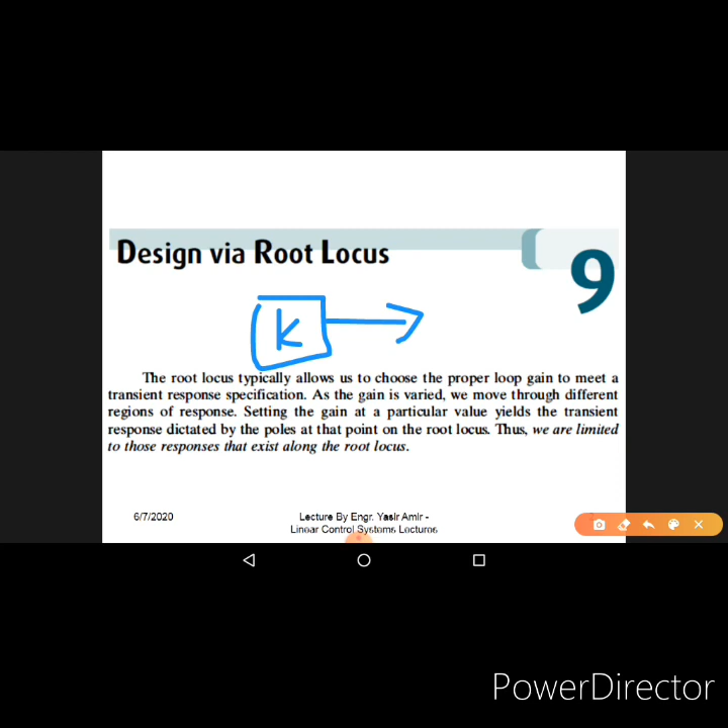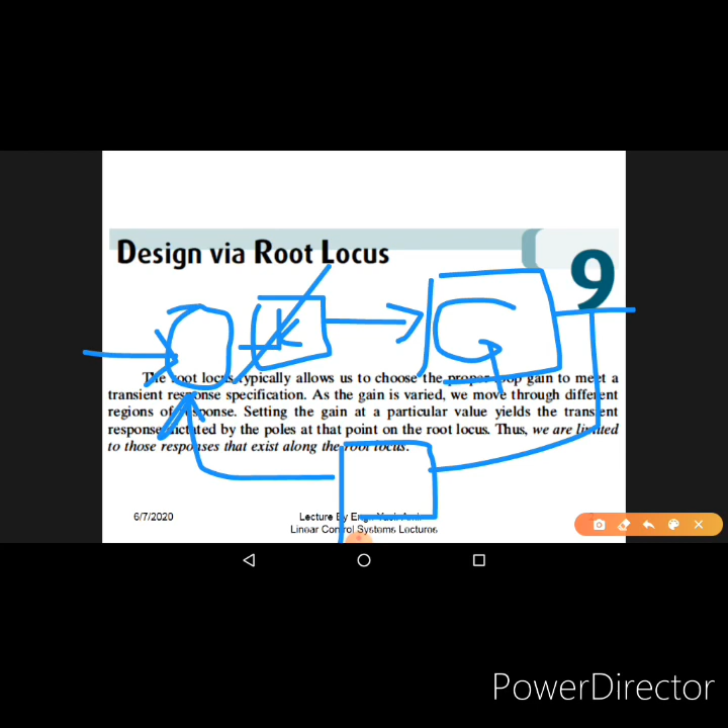So the point is that by adjusting gain k - we have a k before the plant like this, then we have a sensor, and then we have the summer over here - by adjusting this k, we can move on the root locus.

But this is the complex plane, and on that, this is our root locus, something like this. These were the two poles of our root locus. We can have the closed loop poles anywhere on this root locus, these lines, not over here, not over here, not over here. By changing the gain, we can only remain on the root locus, that is this thing.

That is actually the point. And if we want - we definitely will not want the closed loop poles to be here, that's the unstable region. If suppose we want the closed loop pole to be here and here, a pair, then by simply adjusting the gain k, it will not be possible. However, it is possible - we can have the poles over there, but for that we have to use a technique. That is what we are considering in today's lecture.

So this is our slide number 3, improving the transient response.

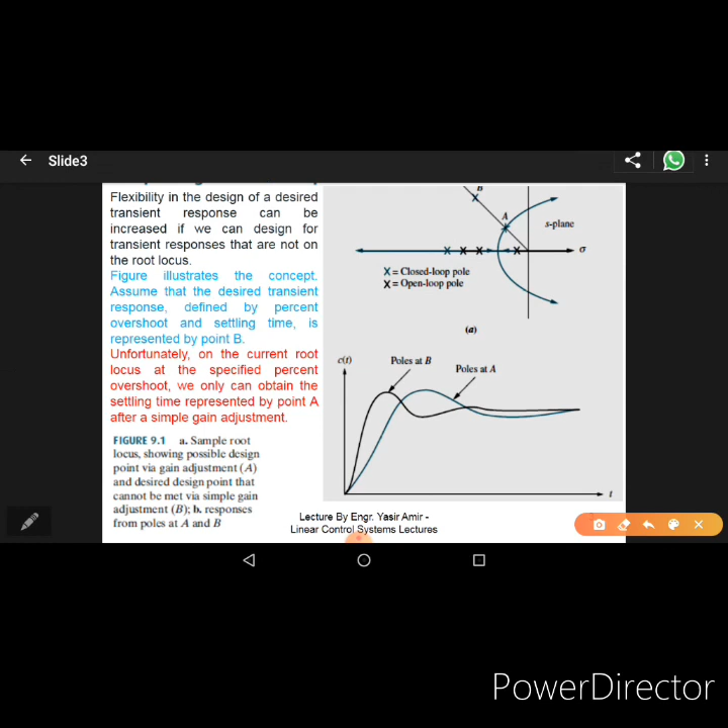What this means is that we want our system response to be here, and that is so because of the settling time and overshoot requirement. We want the system to have so and so overshoot and so and so settling time, and when we translate that into a pole, we have the pole at location B.

But the problem is that we have the root locus over here like this, and we can best move over here. We cannot go to this place, that is not possible. Root locus does not allow it.

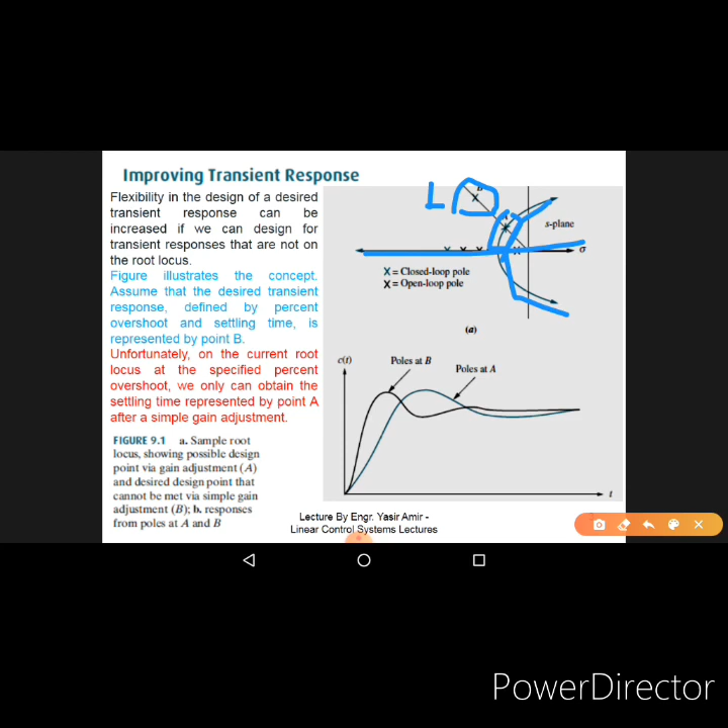So by adjusting the gain, we can only remain on the root locus, and we can best reach point A by adjusting the value of the gain k. Unfortunately, on the current root locus, at the point specified percentage overshoot, we only can obtain the settling time represented by point A after a simple gain adjustment. By simple gain adjustment, the best we can do is take the closed loop poles at point A, along with its conjugate below the x-axis, but on the root locus.

But actually we want them to be at point B.

So what's the solution? Before we proceed to the solution, if you look at the response of the system in time domain, with pole at A, the time response is as shown over here, and with pole at B, it should be like that.

Both have the same amount of overshoot, but the speed of response for the pole at B is faster. There is a smaller rise time. The response rises at a higher rate quickly. The overshoot is the same, but it rises quickly.

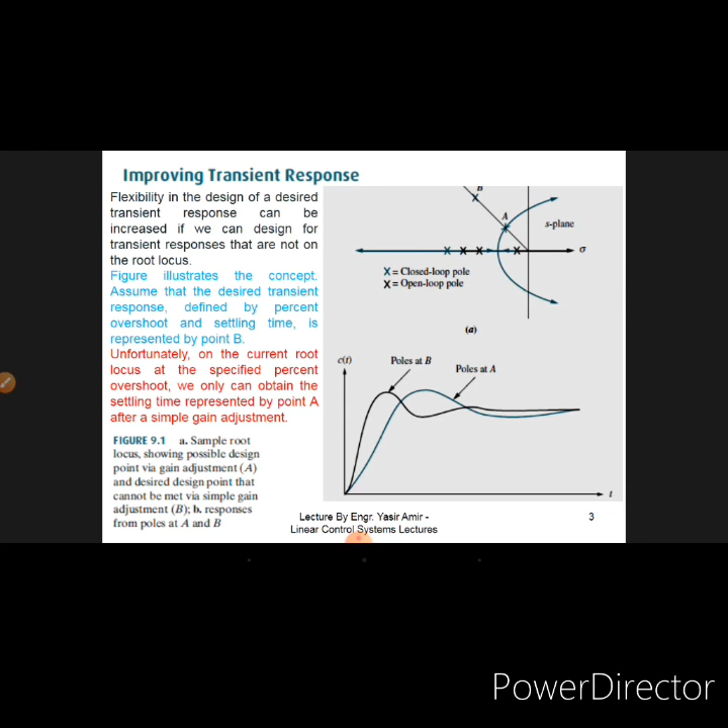So let's move to the next slide.

Thus, our goal is to speed up the response at A to that of B without affecting the percentage overshoot. This increase in speed cannot be accomplished by simple gain adjustment, since point B does not lie on the root locus, like I was just saying.

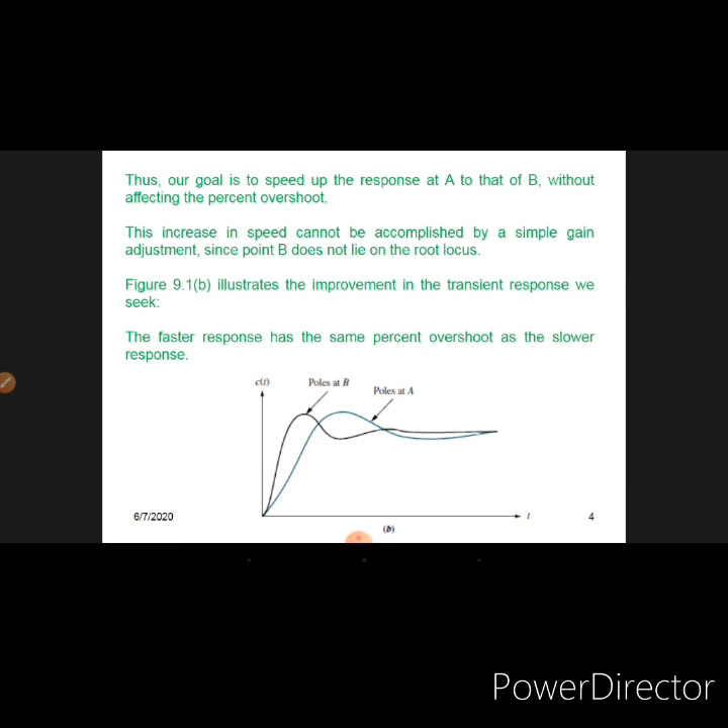This figure shows the improvement in the transient response. The faster response has the same percentage overshoot as the slower response. So what this means is that we want the response to be at point B. This target could not be achieved by simple adjustment of gain. For that we need something more drastic, and let us see how that is possible.

So in slide number 5, one method of compensating for the transient response is to insert a differentiator in the forward path in parallel with the gain. We can visualize the operation of the differentiator with the following example.

Assume a position control system with a step input. We note that the error undergoes an initial large change.

Differentiating this rapid change yields a large signal that drives the plant. The output of the differentiator is much larger than the output from the pure gain. This large initial input to the plant produces a faster response. As the error approaches its final value, its derivative approaches zero, and the output from the differentiator becomes negligible compared to the output from the gain.

What is said here is that in order to improve the transient response, we can use what we call a proportional derivative controller. We can incorporate the concept of differentiation. Differentiation is finding the rate of change of a signal. When you differentiate a signal, you get the rate of change of that signal.

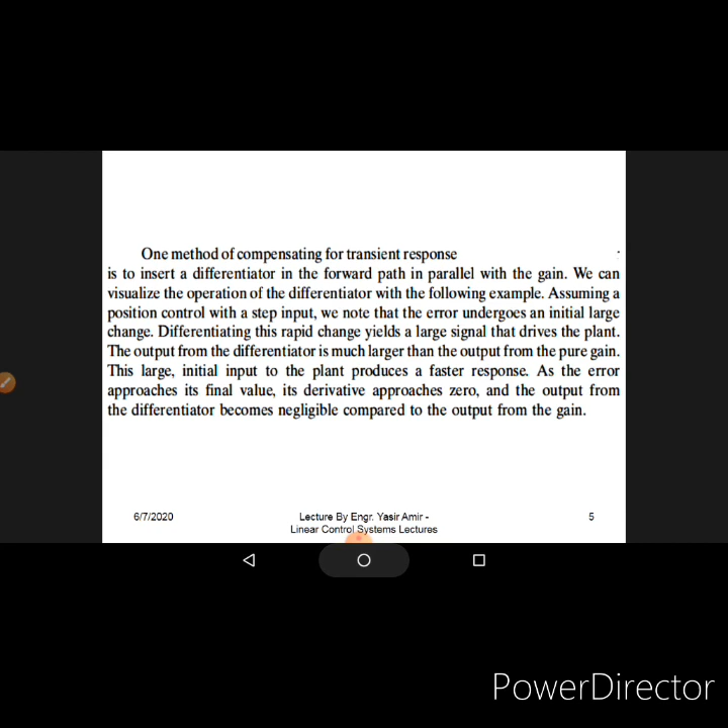So far what I've said is that we have a root locus, and on the root locus, by adjusting the gain, we can place the closed loop poles anywhere on the root locus, but not away from it. Suppose our requirement is that the system behavior should have the closed loop poles located somewhere else, apart from the root locus. That is not possible with pure gain. For that we need compensation.

One compensation we just talked about was adding a differentiator that differentiates the signal. That differentiation produces an output proportional to the rate of change of the input signal, and sends that to the plant to take corrective action if any error signal goes into the system. Faster the rate of change, higher the corrective action; smaller the rate of change, smaller the corrective action. That is only possible with a differentiator. That results in improvement in the transient response, in the rise time, etc., and can make the system response faster.

Right now, first we will focus on improving the steady state error, improving the accuracy of the system, and then we will switch back to the transient response portion using the proportional derivative controller. So here we have improving the steady state error.

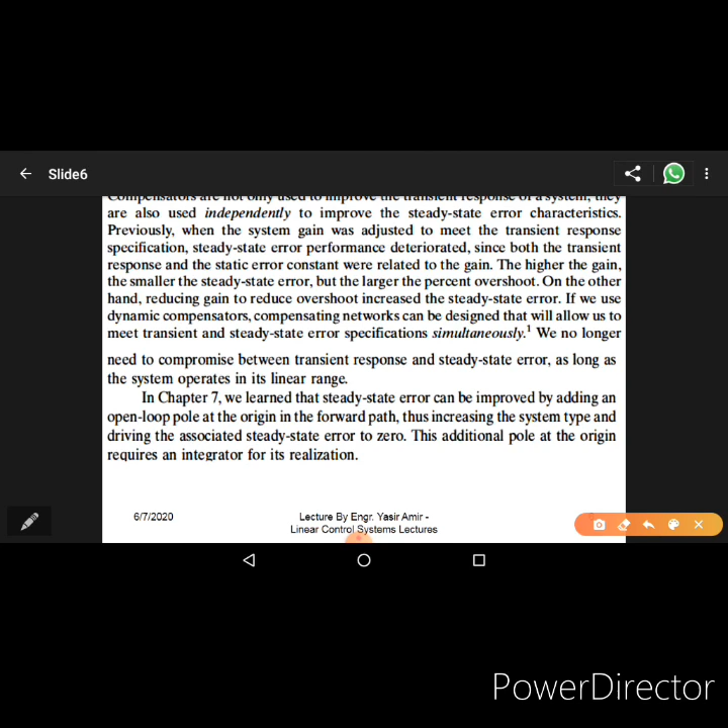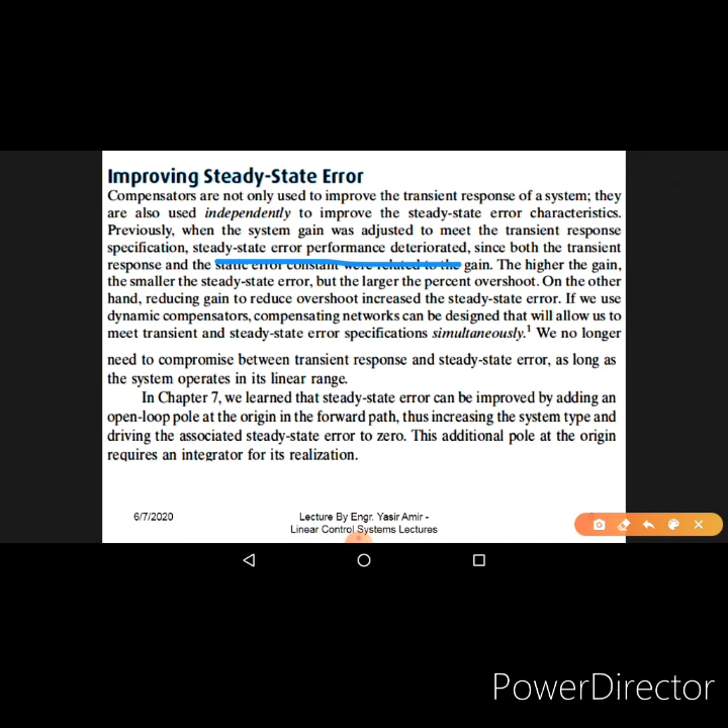Previously, when the system gain was adjusted to meet the transient response specification, steady state error performance deteriorated, since both transient response and the static error constants were related to the gain. If you're not following this, go back to the steady state accuracy portion, where we found the error constants. Previously we saw that by simply adjusting the gain, we could meet the transient response specifications at the cost of steady state error performance. Steady state performance deteriorated, steady state error increased. So these are two conflicting things.

The higher the gain, the smaller the steady state error, but the larger the overshoot. So when we reduce the steady state error and increase accuracy, that comes at the cost of transient response performance, a larger overshoot. On the other hand, if we reduce the overshoot, that increases the steady state error. If we try to improve the transient performance by reducing overshoot, that comes at the cost of steady state accuracy, which decreases.

But both of these things are requirements. We need to improve both simultaneously. If we use dynamic compensators, as we are considering in this chapter, compensation networks can be designed that allow us to meet transient as well as steady state error performance simultaneously. We no longer need to compromise between transient response and steady state error, as long as the system operates in the linear range. We can achieve both transient response improvement and steady state accuracy by using dynamic compensation — the proportional integral controller and the proportional derivative controller.

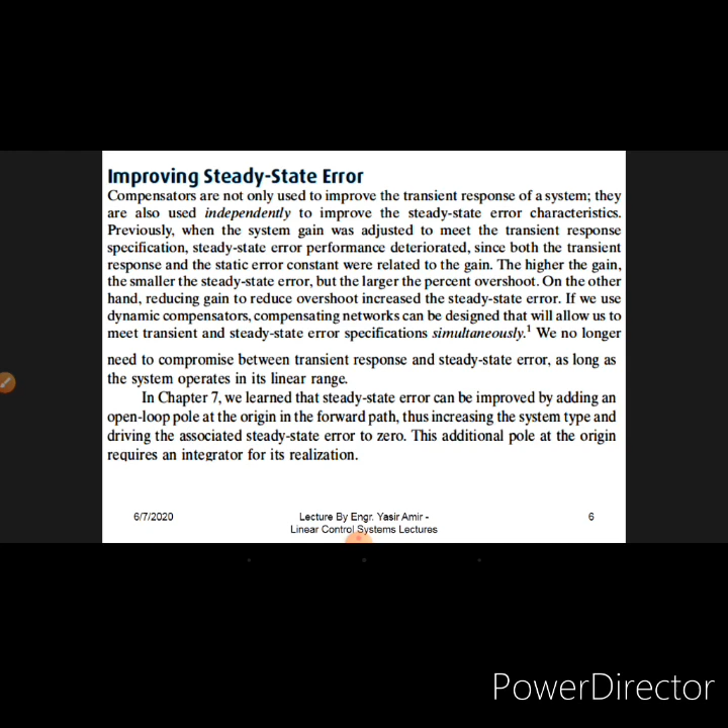So when we add the pole at the origin, corresponding to the proportional integral controller, that results in improvement in steady state accuracy, or reduction in steady state error. Improvement in steady state accuracy and reduction in steady state error are the same thing — steady state performance improves. In summary, transient response is improved with the addition of differentiation, and steady state error is improved with the addition of integration in the forward path. We can achieve both by using differentiation as well as integration — that is called a PID controller.

Ideal integral compensation, PI compensation or PI controller. Steady state error can be improved by placing an open loop pole at the origin, because this increases the system type by 1. We have already seen this in our steady state accuracy chapter.

When we add a proportional integral controller, we basically add a pole at the origin, which increases the type number of the system, and therefore the steady state accuracy increases. For example, a type 0 system responding to a step input with finite error responds with 0 error if the system type is increased by 1.

If we have a type 0 system and give it a step input, it has a finite steady state error. If we increase its type number using a PI controller, that is adding a pole at the origin, we get a free integrator in the loop gain of the open loop function. The type number increases, and the error due to step input becomes 0. In this way, by using proportional integral compensation, we can increase the accuracy of the system.

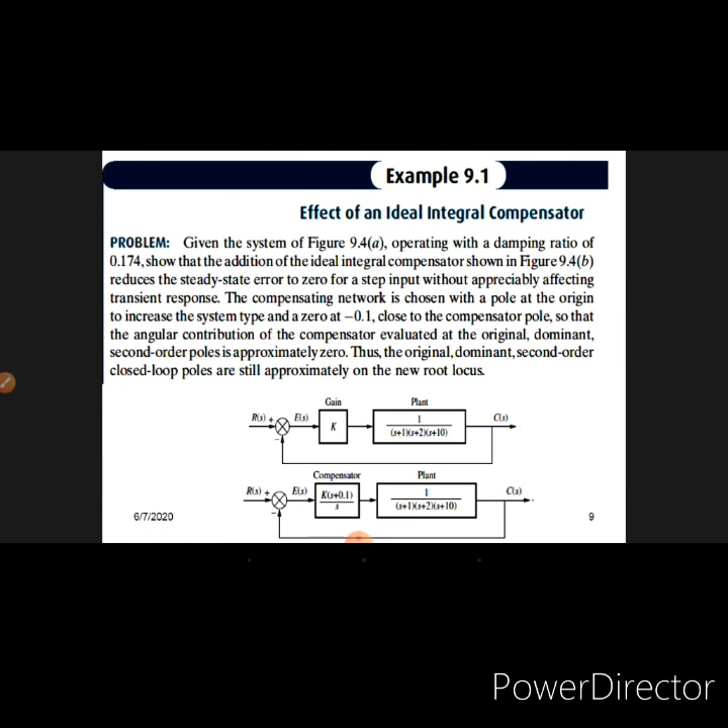Let's work out this example. We have the system shown in the block diagram from the previous slide. We can make the root locus from that block diagram using GH, the open loop function, and this is the uncompensated system root locus, as shown in this slide in figure 9.5. You can get this using the rlocus command of MATLAB, or you can do it on paper as well.

Now what next? The damping ratio, as given in the question, is 0.174. This value can be found if you draw a line at a certain angle. As you can see over here, there is an angle of 100.02 degrees.

If you recall chapter 4, the time response chapter, and look at this figure, it makes a triangle. This is the perpendicular side, and this is the hypotenuse. There's an angle over here; let us say this angle is alpha. Cos of this angle alpha is equal to zeta.

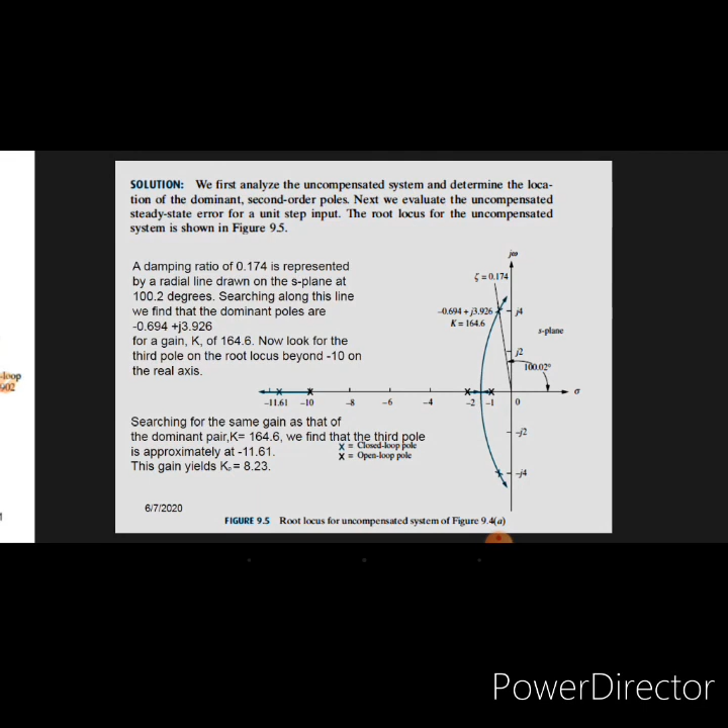So from here, taking the inverse cosine of 0.174, we get alpha, and subtracting that from 180 gives us this angle of 100.2 degrees. So when you draw this root locus on paper, you draw a line at an angle of 100.2 degrees, and where it cuts the root locus, that is the point where you find the value of the pole.

This is very easy to do using root locus in MATLAB. All you have to do is click at a position where zeta is 0.174, finding zeta along this curved portion of the root locus. Then if you click at it, MATLAB will give you not only the value of the pole but also the value of the gain K that gives that closed loop pole, and the value of zeta at that point.

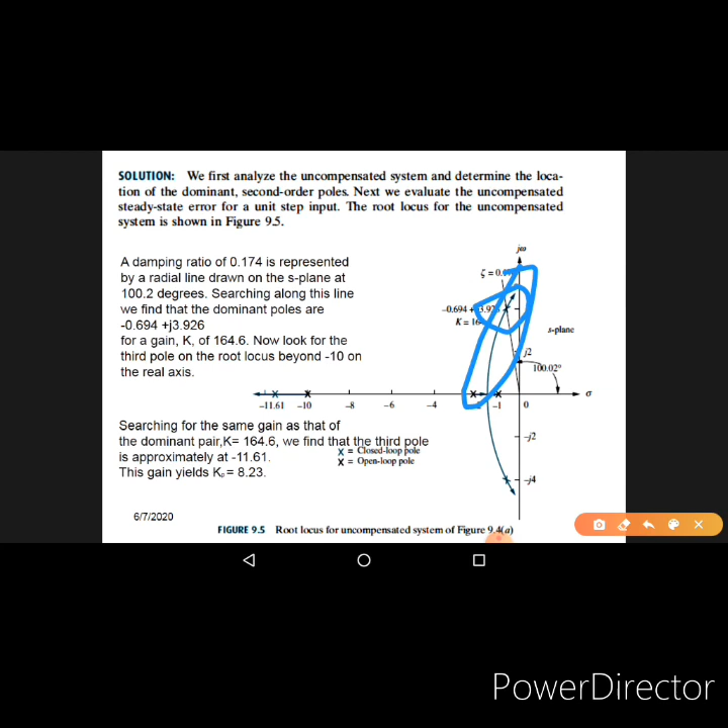Uncompensated system has three poles. The open loop system has a pole over here, here, and over here. But as k increases above 0 and goes to 164.6, the poles start moving along the root locus, and two of the poles reach over here, and the third one, which was here, moves to minus 11.61, for k equal to 164.6.

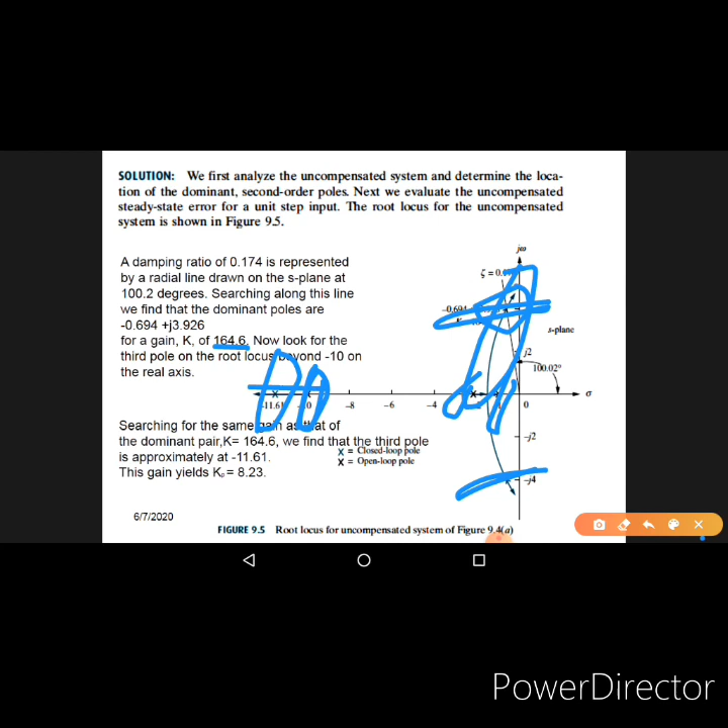Now for this particular value of k, that is 164.6, this value of k of the uncompensated system, we want to know the steady state error, how much it is going to be. For that, we calculate the position error constant, kp, which you can see over here.

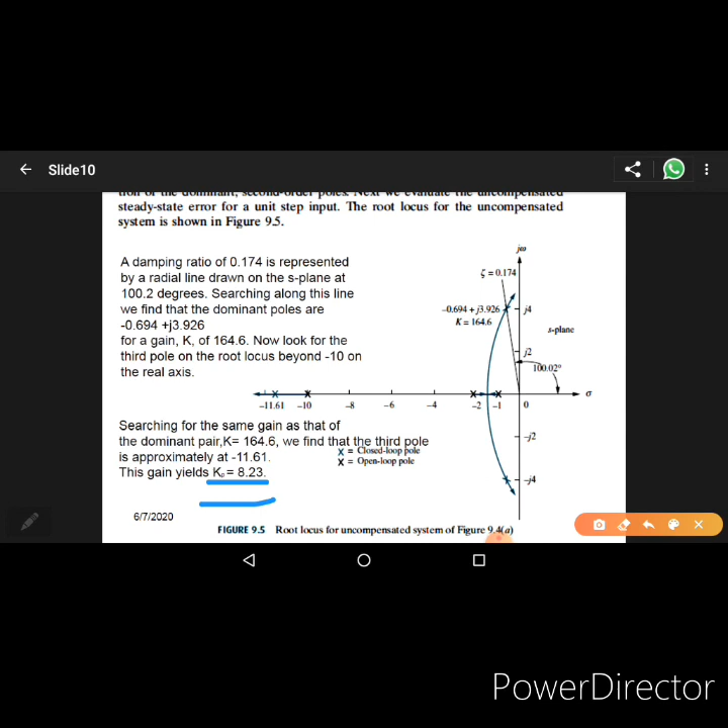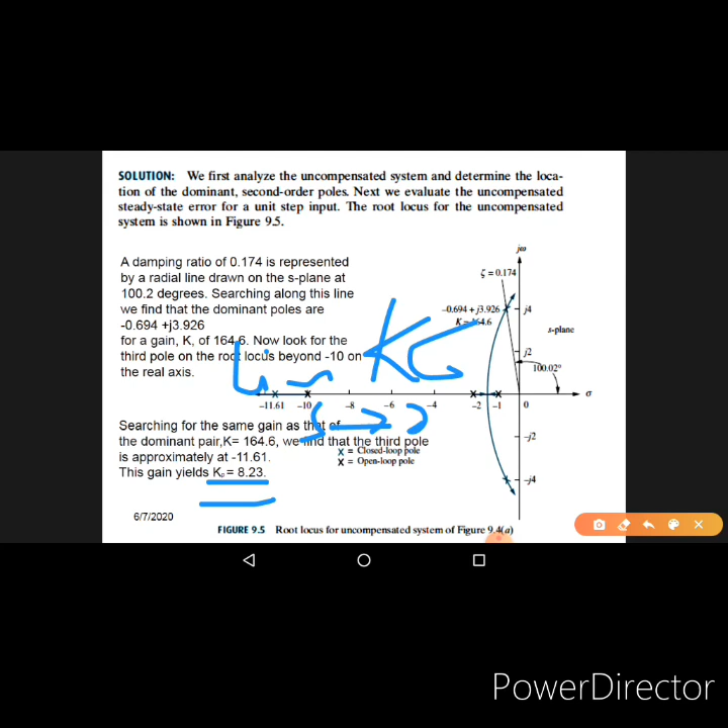Kp can simply be calculated by substituting for the position error constant. We apply limit s approaches 0 on k g h, where k is 164.6, g is the transfer function of the plant, h is the transfer function of the sensor. We apply this limit because this is the value which gives the closed loop poles at a location where zeta is 0.174, which is the requirement in the question. Now at this particular value of kp, we want to find the steady state error.

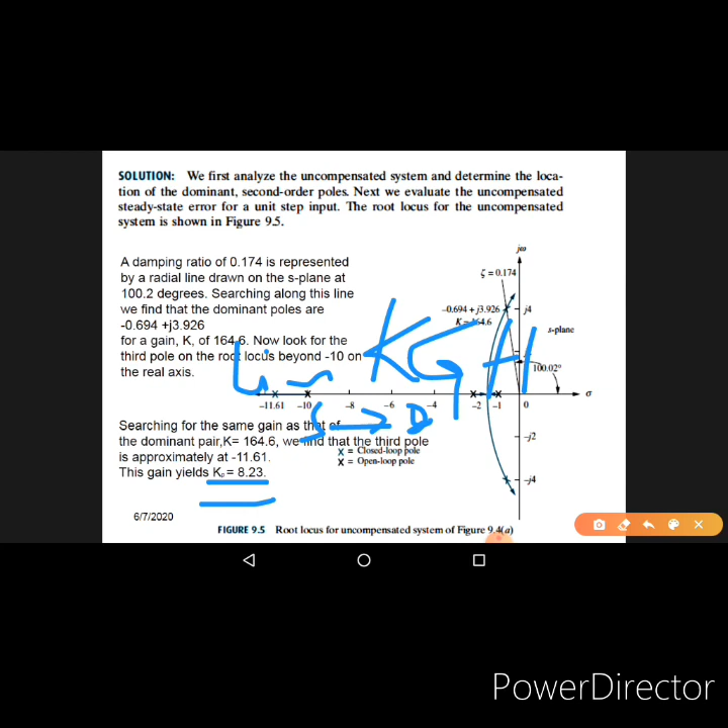That steady state error is found in the next slide like this. For the position error constant, with a step input, the steady state error is 1 upon 1 plus kp, and that turns out to be 0.108. It's not 0, so our target is actually to bring this error down to 0.

For that, we will use proportional integral compensation. We will modify the controller, which was simply k, and change it into a system that has a pole at origin. We change that k into a new system, shown in the second figure in the previous slide, where we have a pole at origin, s equal to 0, and a zero at minus 0.1.

We modify our loop gain kgh by deliberately adding a pole and a zero. We add a zero at minus 0.1 by changing k into k times (s plus 0.1) upon s, making a new transfer function. This results in a pole and a zero being added in our system over here.

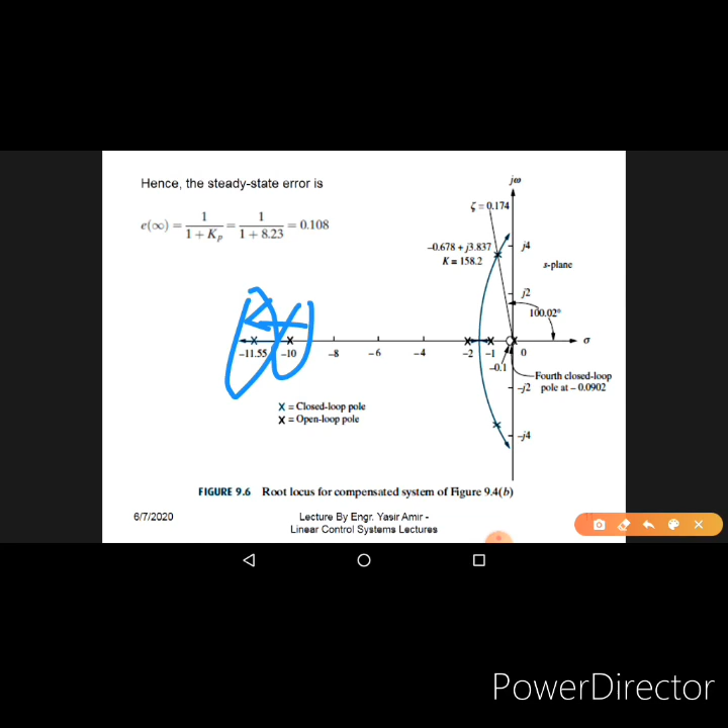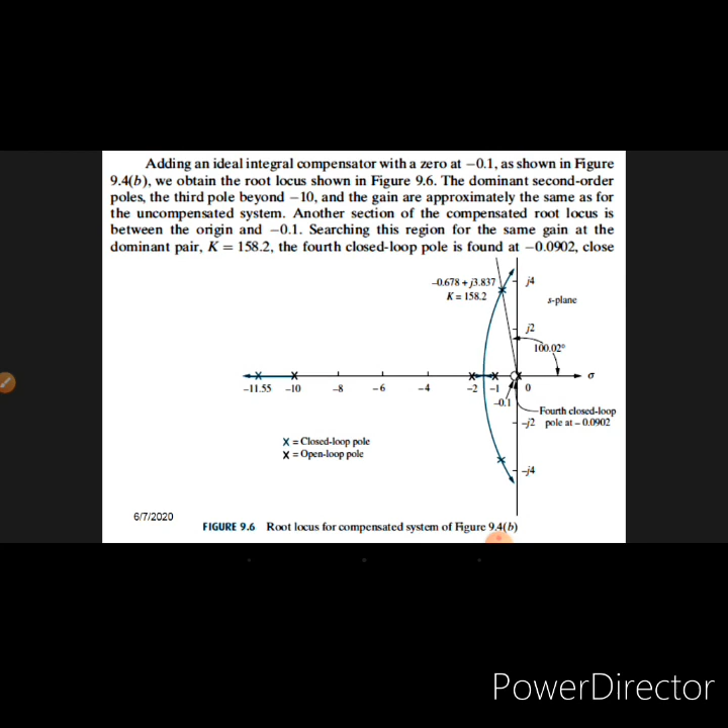So what we have done so far is that we have added a proportional integral controller into the system. After adding an ideal integral compensator with a zero at minus 0.1 as shown in that figure, we obtain a root locus shown over here in figure 9.6, that is this figure.

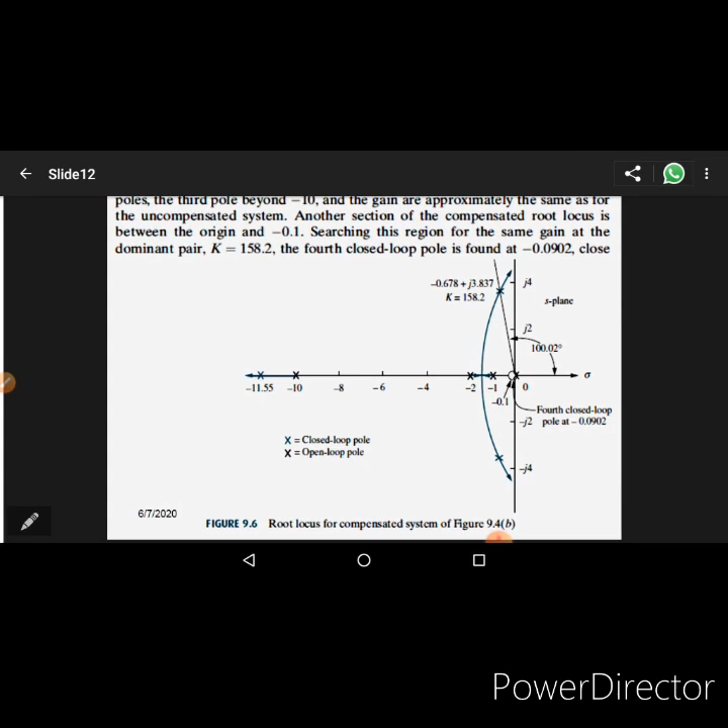Now the dominant second order poles and the third pole beyond minus 10 - this pole, they're talking about this one - the dominant second order poles and the third pole beyond minus 10, and the gain, are approximately the same as for the uncompensated system.

What this statement means is that when we have added the pole at the origin and a zero at minus 0.1 to increase the type number of the system and reduce the steady state error, this has affected the root locus, but very slightly. The dominant poles, which have a major impact on the transient response, have not moved from their previous position significantly by adding this PI compensator.

Another section of the compensated root locus is between the origin and minus 0.1 - there is a root locus section over here. Now let me state a few things again.

Basically, we have modified the system transfer function. We have intentionally added another transfer function which has a zero at s equal to minus 0.1 and a pole at the origin. These are the locations of the open loop function poles: a pole at s equal to 0, a zero at minus 0.1, a pole at minus 1, a pole at minus 2, a pole at minus 10. These are the poles of the open loop function.

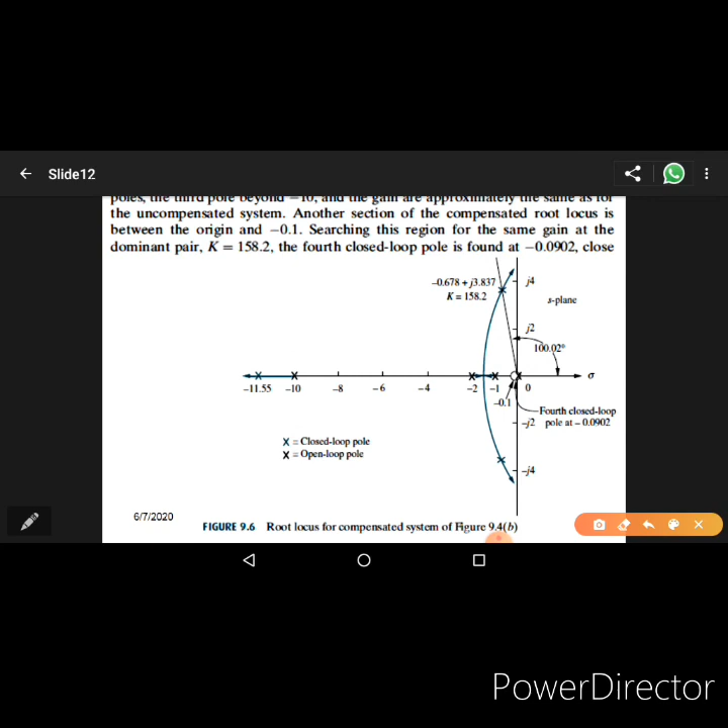Now what's happening here is that with the modification of adding this pole and zero in the system, there's an effect on the overall system location as well. For k equal to 158.2, we get zeta equal to 0.174. Previously this value was different, k's value was different. There's a slight modification in the overall root locus, but it's very slight.

As stated, the dominant second order poles and the third order pole beyond minus 10 - this pole - their open loop positions will not be affected, but their positions as k increases will also be somewhat different compared to the uncompensated system.

The second thing is that we have a section of root locus here as well, and as we increase k from 0 to 158.2, we get the closed loop pole over here and its mirror image over here, and this moves to this new position, that is 11.55 - the minus 10 open loop pole moves to minus 11.5. We also have movement of this pole over here.

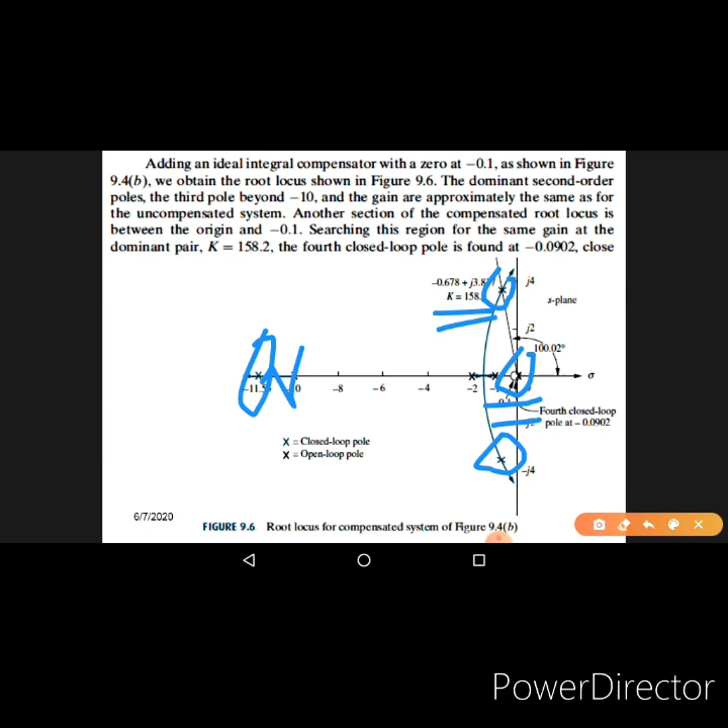This pole moves towards the zero at minus 0.1. The pole which was at the origin will also move towards the left hand side. We have a section of root locus between minus 0.1 and 0, so this moves left, and as stated here, for this value of k we have the fourth closed loop pole at minus 0.0902. This means the pole which was at the origin has now moved to this new location, as stated over here.

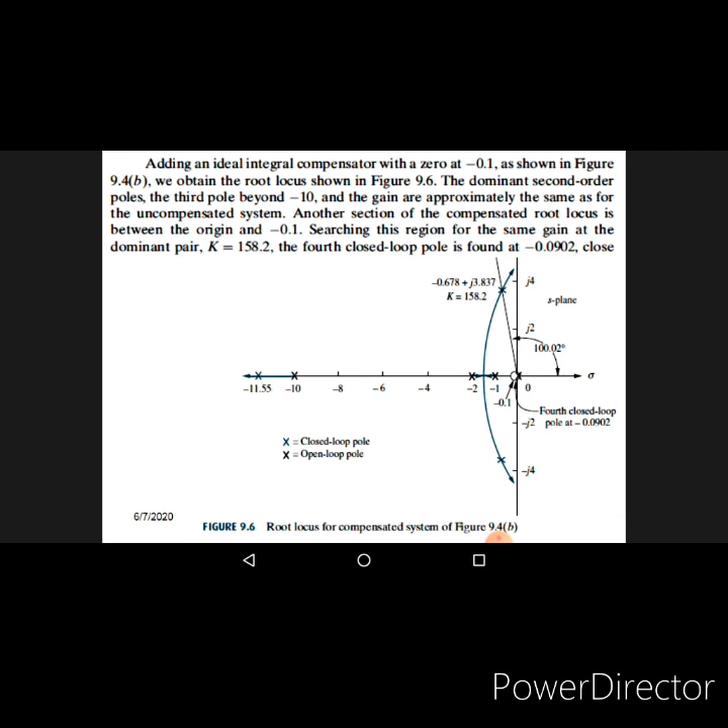Now with all this, what is the benefit, why we did it, what was the outcome or result? We did this to improve the steady state accuracy of the system. In principle, we have increased the type number of the system, so if there was a finite steady state error for a step input, we should now have a 0 steady state error. So now let us see if that is happening.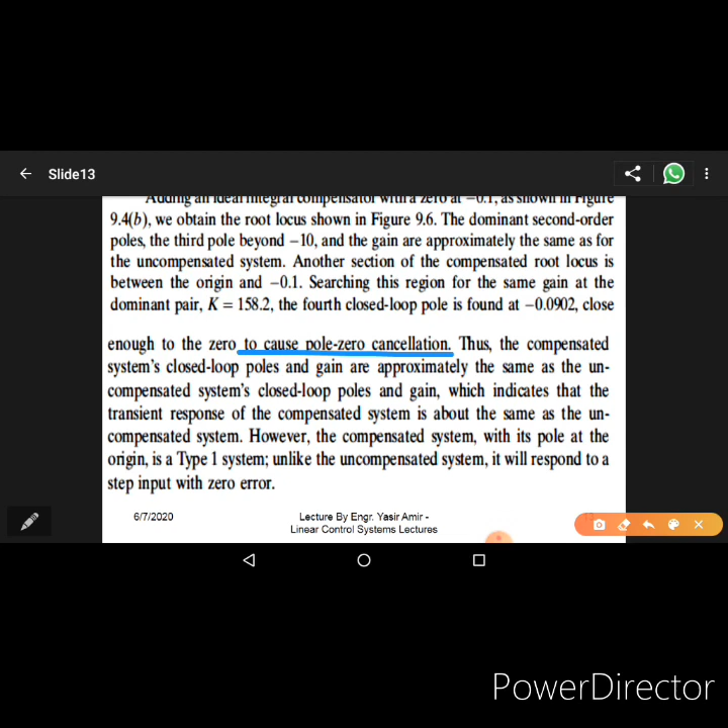Searching this region, from the origin 0 up to the point at -0.1, for the same gain, k equal to 158.2, the fourth closed loop pole is found to be at -0.0902, close enough to the 0 to cause pole-zero cancellation. This means that the compensated system's closed loop poles and gain are approximately the same as the uncompensated system's closed loop poles and gain.

Previously it was 164, now we have 158. It's nearly close to it, which means that the transient response of the compensated system is about the same as that of the uncompensated system.

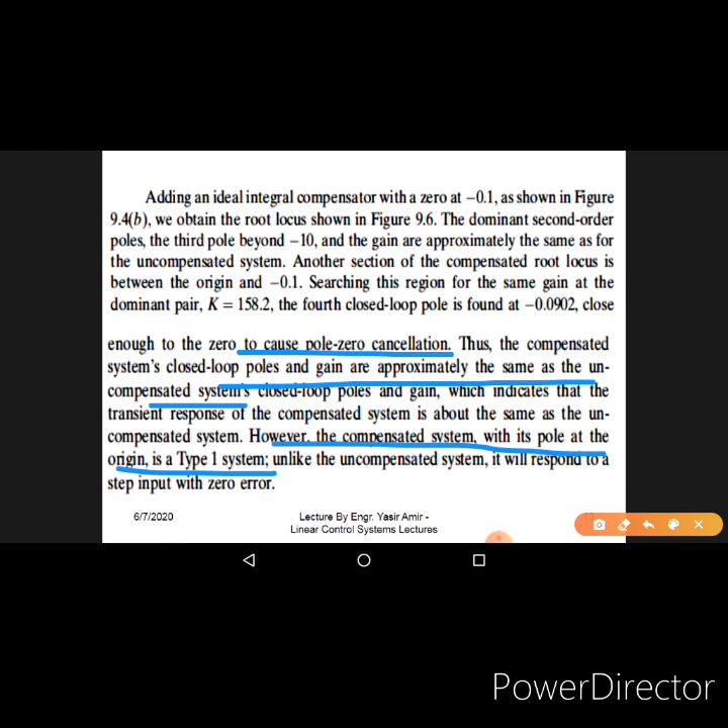However, we have increased the type number of the system by 1. It's a type 1 system now; previously it was type 0. This means that if there was finite steady state error for a step input, now we should have a 0 steady state error for a step input. So this is our achievement.

Figure 9.7 compares the uncompensated system response with the ideal integral compensated response. The step response of the ideal integral compensated system approaches unity in the steady state, while the uncompensated system approaches 0.892. In the compensated system it approaches 1, whereas in the uncompensated system it approaches 0.892.

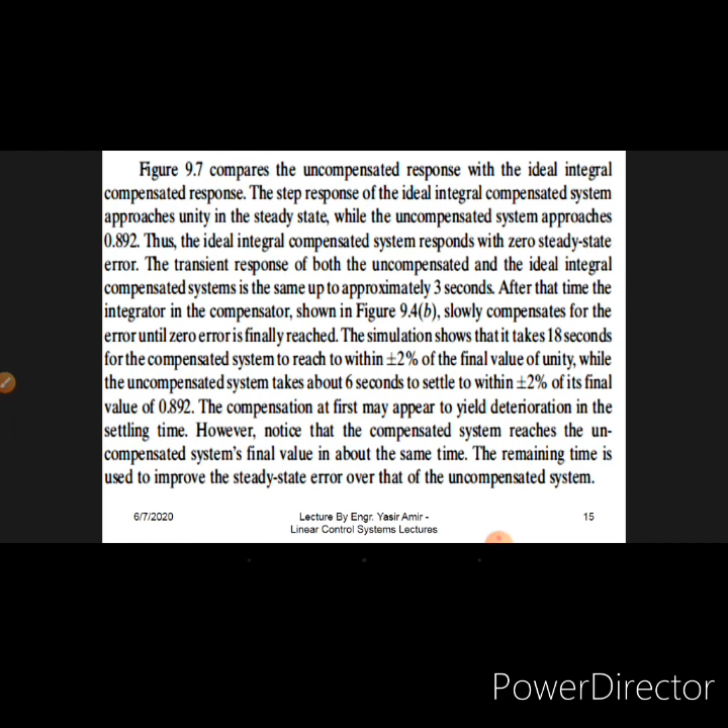However, notice that the compensated system reaches the uncompensated system's final value in about the same time. The remaining time is used to improve the steady state error over that of the uncompensated system.

So now a method of implementing this integral compensator: we have the system in this form, and we add in parallel to it the term K2 upon S. This gives us a proportional integral compensated system - a system with a proportional integral controller. We have K1 plus K2 upon S. We have added a term K2 upon S in parallel.

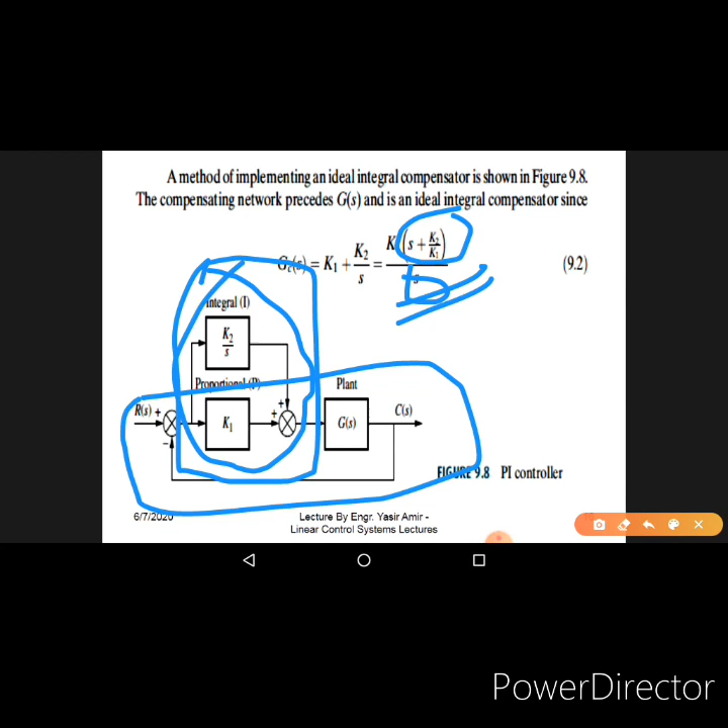The overall transfer function of this controller, GC, becomes K1S plus K2 upon K1, whole divided by S. This contributes a pole at the origin and a zero. By adjusting the ratio of K2 upon K1, we can adjust the position or location of the zero. The zero is for pole-zero cancellation, so that the transient response of the system is not affected by addition of this zero. The value of the zero can be adjusted by varying K2 upon K1.

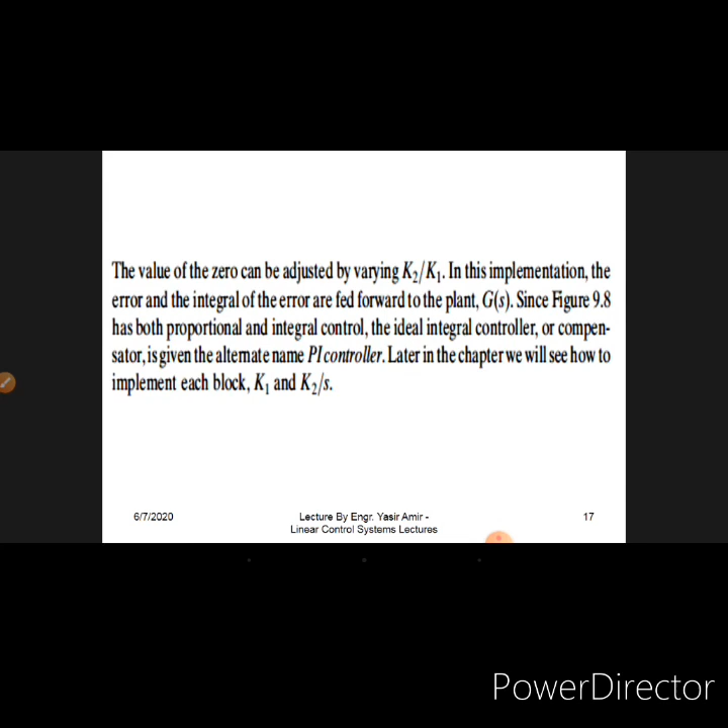In this implementation, the error and the integral of the error are fed forward to the plant. And since figure 9.8, which you have just seen, has both proportional and integral control, the ideal integral controller or compensator is given the alternate name PI controller. We call it PI controller. Later in the chapter we'll discuss this further.

So next, ideal derivative compensation.

So far we have seen proportional integral compensation, which is basically used to improve the steady state accuracy of the system. Now this thing we are considering right now is used to improve the transient performance of the system.

Transient performance includes the rise time, how fast the output rises towards the steady state value, and the overshoot, the peak that occurs during the initial transient portion. That is something like this: we have the steady state, this is the overshoot, then it undershoots and settles down. So this is called the overshoot. And rise time is basically how fast on the time axis this response rises towards the steady state value, and this is our steady state value.

So the derivative compensation, proportional derivative compensation, PD compensation, is basically used to improve the transient response performance of the system. The transient response of a system can be selected by choosing an appropriate closed loop pole location on the S-plane. If this point is on the root locus, then simple gain adjustment is all that is required to meet the transient response performance.

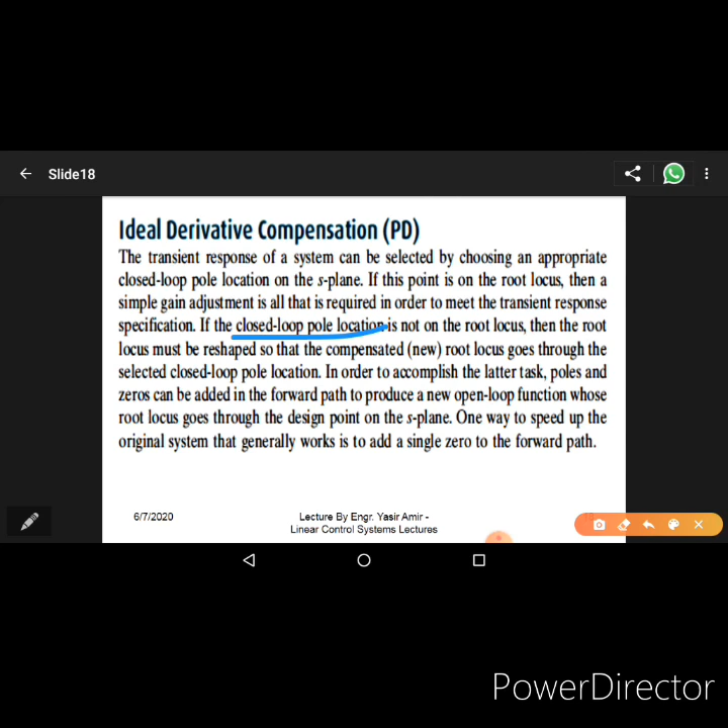That is what we are considering here. If the closed loop pole location is not on the root locus, then the root locus must be reshaped so that the compensated, new root locus, goes through the selected closed loop pole location. The desired location where the closed loop pole should be is obtained from the required behavior of the system. If that desired location happens to lie on the root locus, there's no issue, we simply adjust the gain k of the controller and get the poles there.

But if it is not so, which is the case most of the time, then we have to use a proportional derivative controller to reshape the root locus and bring it to pass through that required point. The closed loop poles are then set on that location. In order to accomplish this, poles and zeros can be added in the forward path to produce a new open loop function whose root locus goes through the design point on the S-plane.

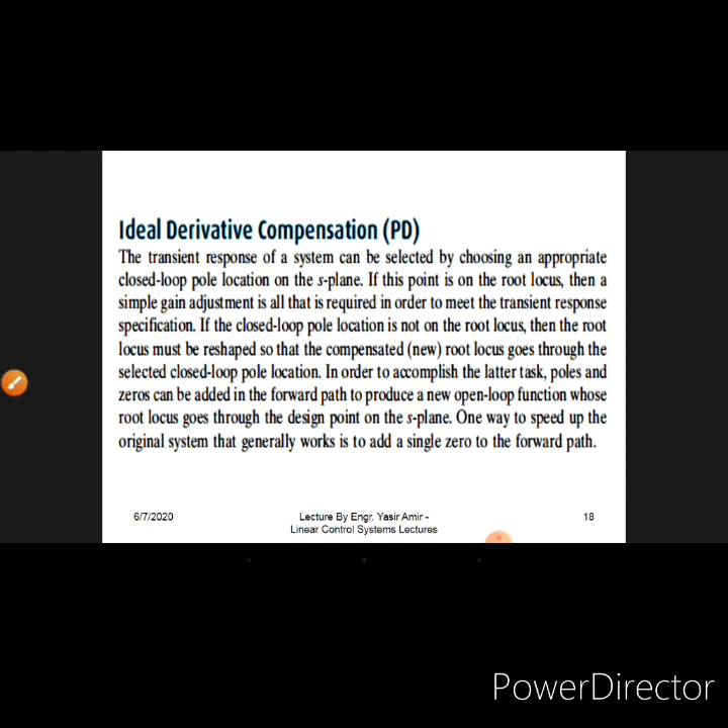One way to speed up the original system that generally works is to add a single zero to the forward path. This zero can be represented by a compensator with transfer function s plus zc. By simply replacing k with this s plus zc term, we can get the effect of a proportional derivative controller. This function, the sum of a differentiator and a pure gain, is called an ideal derivative or PD controller. Judicious choice of the position of the compensator zero can quicken the response over the uncompensated system.

In summary, the transient response unattainable by simple gain adjustment can be obtained by augmenting the system's poles and zeros with an ideal derivative compensator. We simply add this into the system and can achieve the desired closed loop transient response performance. We will see this in detail in the next lecture. Don't worry about it, we will cover the proportional derivative controller in the next lecture.